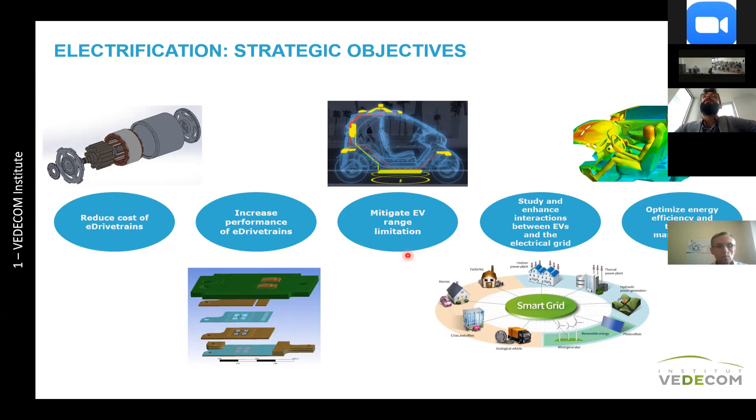And today we will be focusing on mitigating the range limitation of electric vehicles. This project is called VERA, for electric vehicle without a limitation on range.

So some context from the beginning of this day about the economic and especially climatic impact of electrifying transportation systems. We are confident that EVs are one of the main players in the energy transition. In France, up to recently, we had major incentives for people to buy electric vehicles, and we are having a very big deployment of charging points, with a roadmap of 7 million charging points by 2030. The government and the European Union are heavily subsidizing the deployment of EVs, and if you want to deploy EVs, you have to have the infrastructure able to charge them.

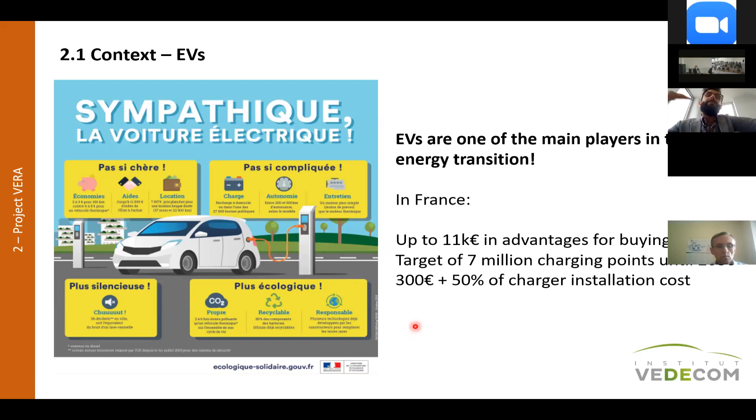So as I said earlier, we look at these questions, the charging infrastructure, but we also have a longer vision about how EVs can and should be charged. You have what I'd call the range problem. To address this, you have the recharge infrastructure of EVs, which we call in French IRVE. The idea is that we can have lots of high power charging in order to reduce the charge time of an electric vehicle. But is it the best way, the best user experience, the best way to be stopping in order to recharge?

Wouldn't it be possible to mutualize the infrastructure? Because when you have a charger, only one car can charge. Is it possible to charge several cars at the same time without having several chargers? Would it also be possible to reduce the battery size of the vehicle? Because if we can charge while moving, we can have less battery weight and be more energy efficient. This will have a big impact on user experience and habits, as we can already see in tramways, where some cities don't allow cables or visual pollution in historic city center areas.

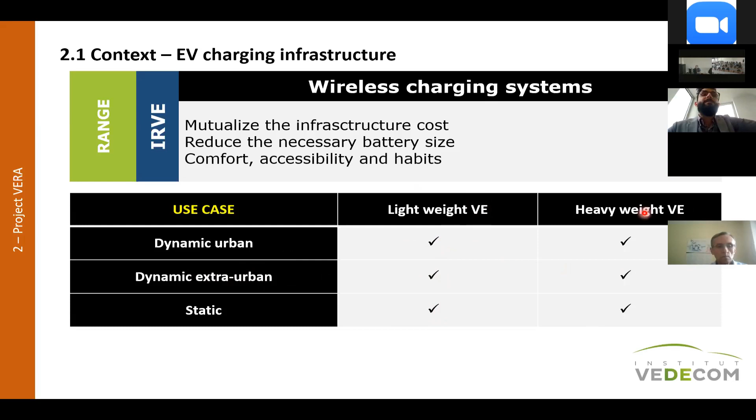You have the dynamic extra-urban charging, mainly on the highway, and you have the urban wireless charging for the city. This is for light EVs, and you also have heavyweight EVs, so this covers everything from heavy transport to light duty vehicles. Our objective is to provide technologies to enable these wireless charging systems across these use cases.

So the question is, how does wireless charging work? It's not very complicated from an electrical and electromagnetic standpoint. Conceptually it's quite easy: you have a track, and on the track you have coils embedded in the road, and on the car side you have a receiver coil. It's the same setup as on your charging pad and smartphone, but with more power and heavier components. You go from the power grid to an AC-DC converter.

You have to filter out everything we'll be doing on the high frequency side of the circuit. Once you go to DC, you have a second stage of DC to AC conversion, but this AC will be around 85 to 90 kilohertz, in order to have the system radiate magnetic and electromagnetic field from one coil to another without any connection between them. So you have the ground coil - these are the track components - and on the EV side, you have the EV coil with the charger connected to the battery. The power transfer happens between these two coils through the air.

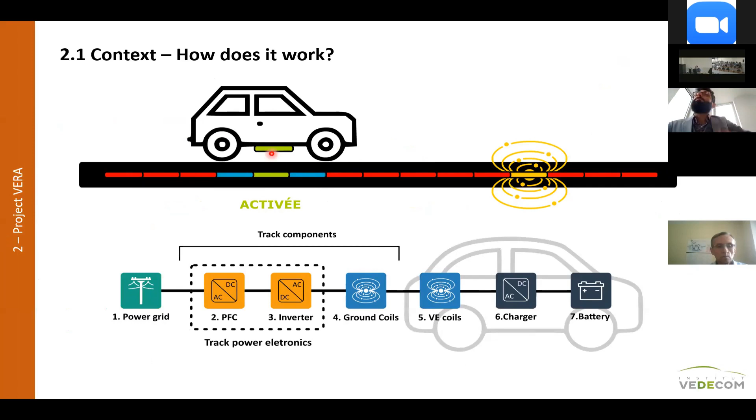So this is the broad concept. In this project, we are funded by Renault Group, PSA - so PSA is Peugeot, Citroën, and Opel - EDF, the French national energy provider, and the French government, as well as the department in charge of the Versailles area.

So as I told you, the project in a nutshell: we study the techno-economical evaluation of wireless charging systems. How much power should we provide in each use case? How do we characterize, test, and evaluate these systems? If you look at the literature, some startups are already proposing systems that they're showcasing in certain areas of the world. We also develop our own wireless charging system. And the most important part, from an industrialization point of view, is interoperability and standardization, because the same track should be able to charge several different cars.

Some of our work is based on mathematical modeling. So you have lots of modeling, simulation, 1D, 3D simulation, but also experimentation activities in the lab.

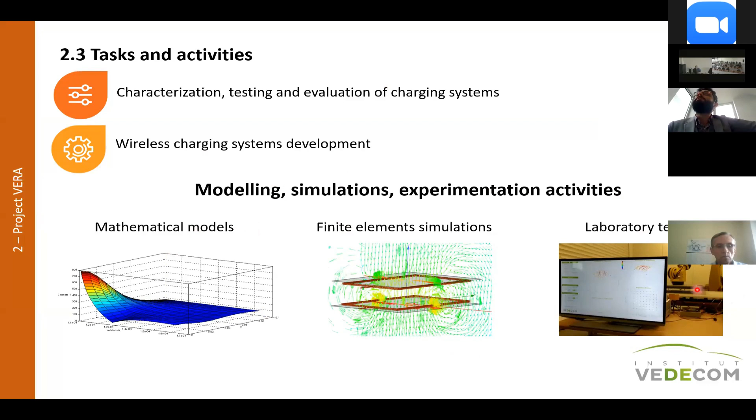You can see here we have a robot with a simulated track, so several coils on the table, and one coil that simulates the car. We can characterize at each point and measure different characteristics, as you can see in the video here.

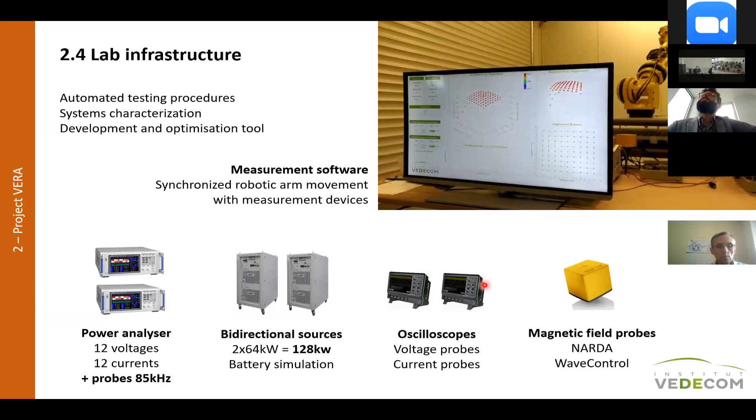You have the robot that is moving, and at each point we are using magnetic field probes in order to characterize the radiating magnetic field, because we have to also be very compliant with safety regulation. So here you can see some characterization that is being done, and the fact that we have this robot, we can also optimize the functioning of our system with different parameters.

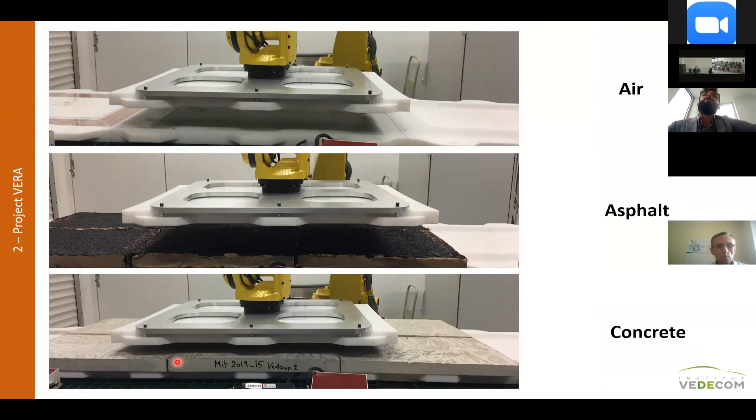These are the coils, here you can see them in the track, and of course you can have asphalt or concrete. We should be able to characterize the impact of different parameters like material, alignment, and air gap on the energy transmission.

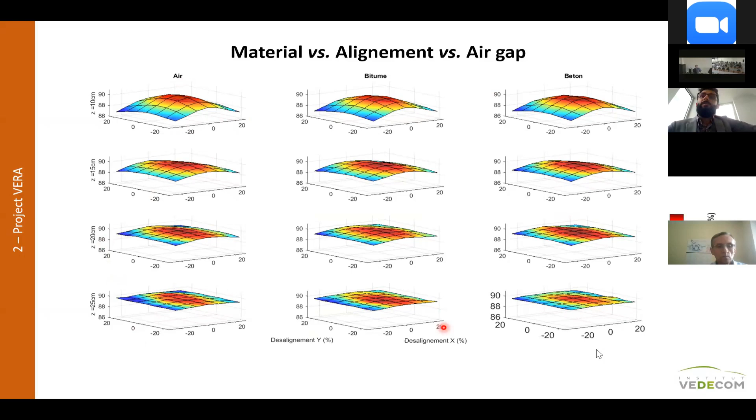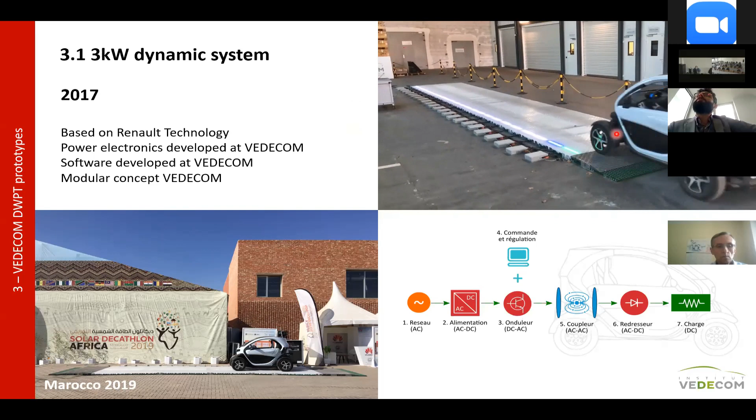Here the Twizy, when it goes up on the track, will emit the electromagnetic field that will be received on a coil in the car. And of course here, we need a visual representation of the power transfer, so you have very powerful lights that turn on behind the Twizy.

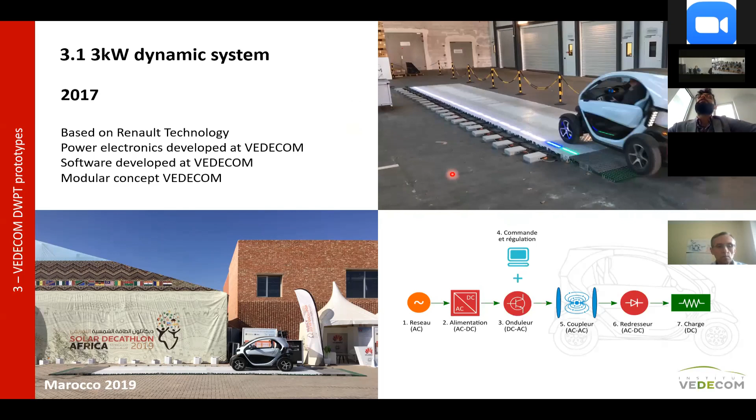And on the highway, it will charge at, I would say, 7 kilowatt rate. So it's like you are traveling on the highway, you are not depleting your battery, but you are charging at low power. So 30 kilowatts is a modular design that can be used on light cars and intermediate heavy duty vehicles.